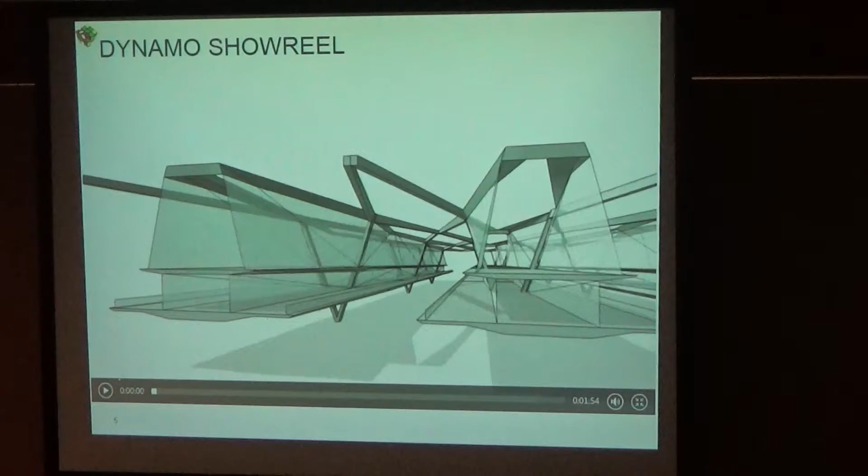But according to the company website, this is the definition of Dynamo. It extends building information modeling with the data and logic environment of a graphical algorithm editor. Yes, it's a programming interface. It is similar to macros, but you don't have to have any programming experience to use this. It's basically pretty pictures with functions attached to them that get placed in a workflow or a specific sequence that can perform functions. Right. I want to show you a quick show reel from the Dynamo website, and the idea is just to give you an idea of what Dynamo's capabilities could be.

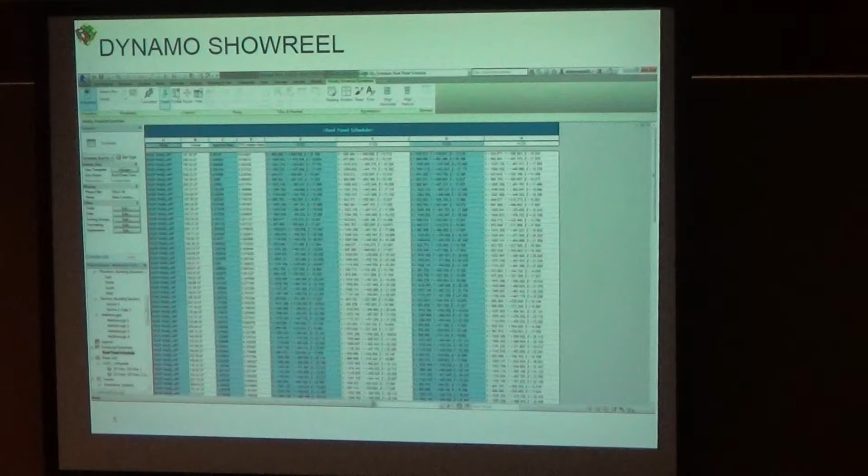Okay, so the purpose of that video is just to show you some of the bragging rights that Dynamo has accumulated since its inception. It's quite a powerful concept and a powerful tool that can actually produce quite a lot, but let me add to this that it is buggy. Currently the latest version is 0.8.2, so the 0 should indicate to you lots of problems.

Not that I'm saying it's not worth it. It's definitely worth it. I'm just saying it is what it is. Say again? You're not saying it's not worth it. You are saying it's what it is. It's worth it. It costs money and it's got bugs. Yeah. But again, there's nothing else that can do the same job, so you're pretty much stuck with it.

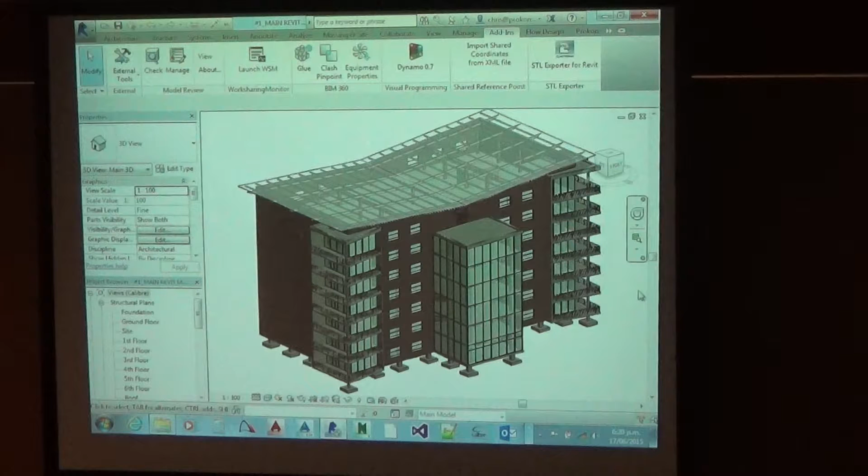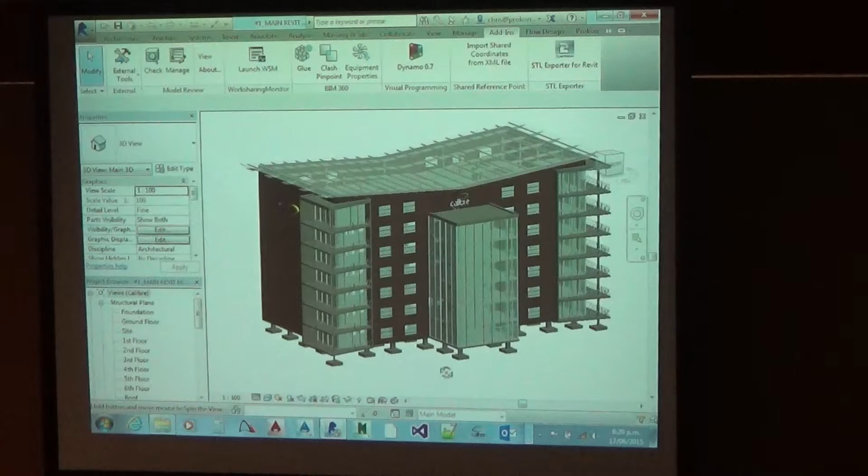All right, so let's jump into it. Now, again, there are many demos available online. I'll give you the link to the Dynamo site where you can get lots of tutorials, videos, samples with scripts on how to follow them. What I want to do tonight is slightly different, and this might apply to all disciplines. I've got a basic Revit model with some structural and architectural components. What I'm going to attempt to do is to extract all the columns from this model for this example, and then add a mark to them.

So basically I'm running the positioning macro from the extensions, but I'm going to use Dynamo to do this, and I want to build some intelligence into this. So instead of just marking all of them with some sequential numbering, I want to be able to coordinate that according to their position and level within the model. So we'll start off simple, create a basic extraction and a basic placing the data back into the model, and then after that we'll run a bit more complex geometry based sequence.

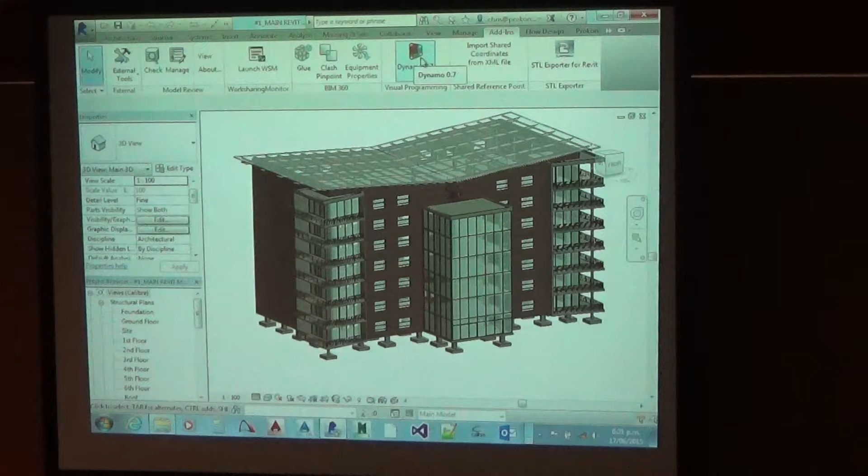Alright, so as I mentioned before, there's a newer version of Dynamo available, 0.8.2. I've tried it and I find it to be more buggy than the previous versions. The most stable one that I've come across so far, it might change week to week, but currently 0.7.5 is the best one. So that's the one that I'm going to use. You can have multiple versions installed. It will just list them on the drop-down. But as soon as you've run one in an instance of Revit, then for the rest of that application lifetime, until you close it, you can only use that one version. So if you want to use another one, you close it down, open it up again, then launch the other one.

So, all right, this is the Dynamo interface. So I'm going to start with a new project. We'll build this one from scratch. I'm going to click on new.

Now just to explain the interface, you'll see there's new, custom node, and open. Custom nodes are sequences that you can create for yourself, which I'll get to in a second—basically a combination of a couple of built-in tasks that you combine into one sequence. All right, so that would be a custom node.

Now, if I start a new project and we look at nodes, that would be the items listed here on the left-hand side on this panel. So what I would like to do is first extract all the column elements from the model, put that into an Excel spreadsheet, do some functions in Excel, and then bring that information back into the Revit model.

All right, so first I'm going to start with extracting the geometry. I'm going to tell it to access a Revit component—it's going to be a selection component. And how do I know this? I don't. I Google a lot, and you really have to just fiddle around and sort of trial and error until you get the best solution.

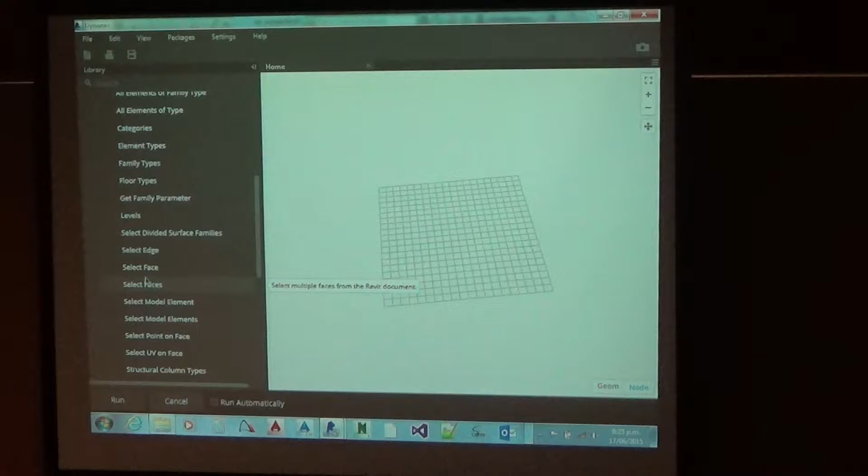This one is my solution. Yours might differ from mine, so it all depends on what you want to achieve and how you go about that. But I would like to query categories. So I've placed a new node now into my workspace, and from this I can indicate the category—in this case it's going to be structural columns. So from the list I can select structural columns. It won't list all the available categories in the Revit model, it will list all the available categories in Revit.

Okay, so it's quite a lot of them. Alright, so now that I've indicated that I want to extract, or I want to work with a selection called categories, I have to tell it that I want all elements of that category. So notice how each node has got an output and it might have an input.

In the case of categories, the input is manual. In case of output—oops, did I break it again? Let me just quickly tell it again: I want structural columns. So once I've selected that, I need to take that output and plug it into the input of all elements of that category. So this is basically a node, or a feature, that performs a list of tasks.

Now those ones can be a combination of a couple of other nodes, or it could be a Python script. So you can actually do some proper programming within Dynamo if you really wanted to. Anyway, so now we've said we want all of those elements.

Now what I would like to extract from this is first of all the name of the column, and then the ID of the column. That's quite important. So to do that I'm going to search for that node. It's going to be under Revit—it'll be an element node. Under the element category I'm going to query the element name.

Right, so I click on it and I place it. Now, I've obviously done this before. If you are not sure where to find the nodes, it's actually much easier typing it in. So if I want the element ID, I could just type element.id, and notice that it will filter out the elements in the list, and I can just click on it and place that in the model where I want to create it.

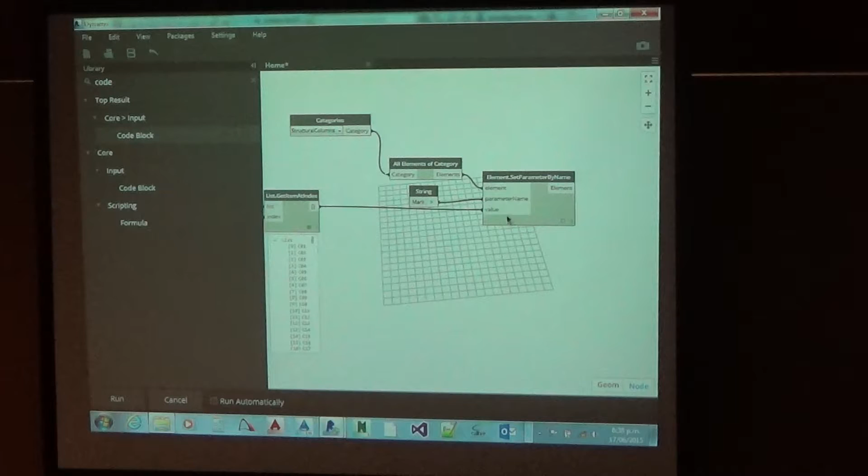Okay, so now we pretty much have what we need, I think. So let's see what happens. I'm going to run this, and if I don't get any errors or crashes, then it's worked.

It's worked. Okay, so let's go back into Revit. Now let's have a look at what happened.

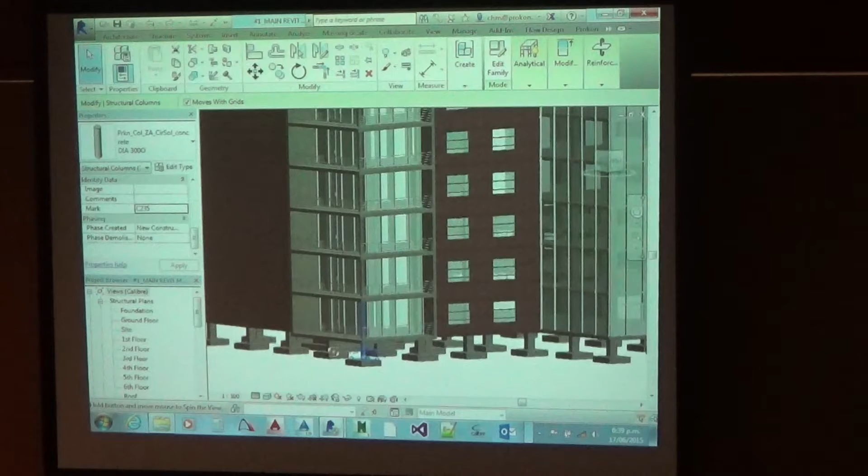So if I select the first column here at the base, C235. So something has happened. This one, C33, C32, C31. You can see it's pretty much not very well numbered. They're pretty much in the order that I placed the columns when I generated the model, except it's reversed. So the last item would be numbered first and then all the way back to the beginning, which could mean anything.

So it's already a good start, but now I would like to actually coordinate this a bit better and organize this. Now I took exactly the same input. I'm just going to open up the output files to show you what it looks like, and I'll make that available somehow so you can download it as an example.

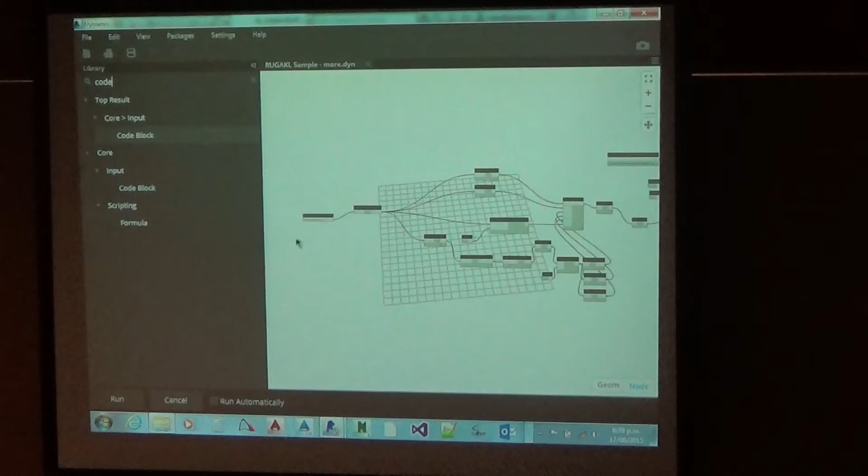But let's look at what is required to get more out of this. So the first thing I did is I used that exact same method. So there's my input category, structural columns, all elements of that. I wanted the name and the ID, and then I just said I wanted to query the mark because I've already assigned a mark here, remember, but I don't have to because I'm going to change it. And then I said I also want to query element geometry, specifically the bounding box.

From the bounding box I could get the minimum point. Well, min and max as that thing says, but I wanted the min. So I wanted the minimum point, x, y, and z. Once I've got the minimum point, I put it into a list, and I got the items at the indexes that I require them for x, y, and z. How did I know which index I have to work from? I didn't. I placed a check there, I ran through it as I built it, looked at the output, and then saw, okay, 0, 1, 2, 3, that's the one I want.

And then from that, I created point x, point y, point z. These nodes, I did not create them, I just took them from geometry, point, and you'll see that they are create, query, etc. x, y, z. So I queried the x, y, z positions of the bounding boxes of each column.

And that should at least give me some sort of a uniformity if I modeled correctly. If I use one column from the base all the way to the roof, then this doesn't work and you probably shouldn't use Revit. But so it all depends on the way you've modeled.

Now once I've done this, I created a new list. Instead of just using the name and the ID, this time I've got name, ID, what's the third one here? I've got X, Y, Z, and then finally I've got the element parameter written into that. Transpose the list, put that all back into an Excel spreadsheet.

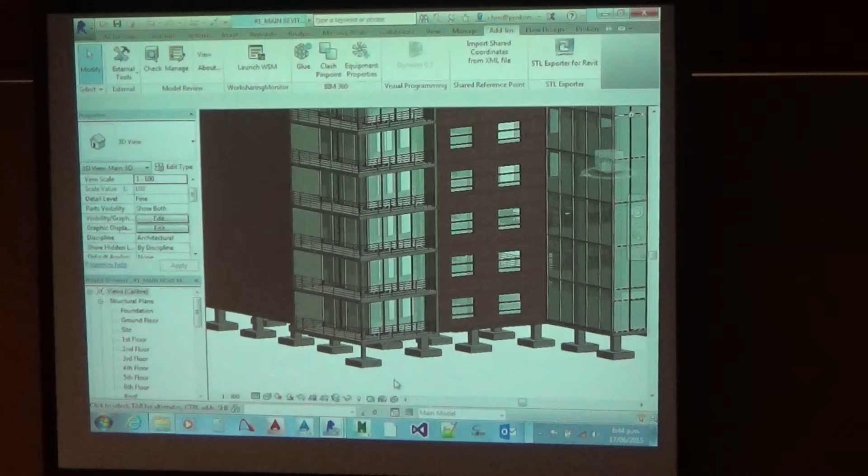When it opens up Excel, that's pretty much an indication we got to that step already, which is good. I'm going to minimize that, minimize this, look at my Revit model, look at the numbers, and notice this one is CO1, CO2, CO3, CO4, but let's go a bit further.

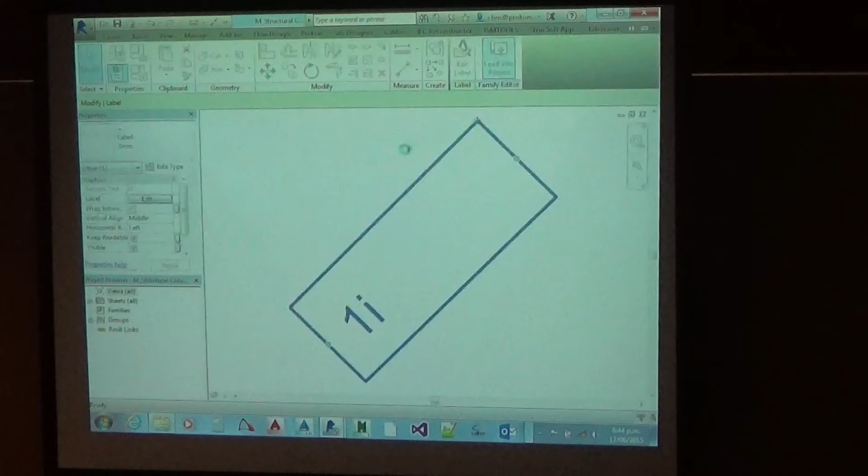I'm going to go to my ground floor level and quickly annotate all the columns, then cheat and change this family so it shows me the mark numbers. Let's show the marks of all of them. Load it back into the project. There we go - starting from the bottom left, CO1, CO2, CO3, CO4, CO5, CO6, CO7, CO8.

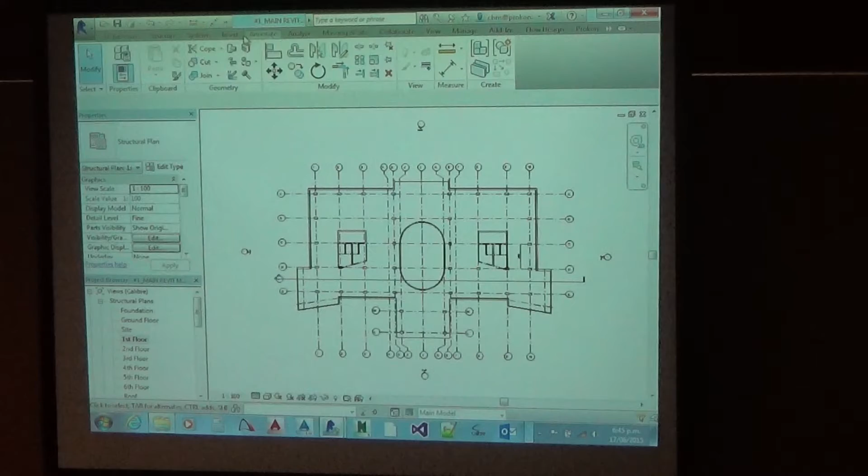Pretty neat. If we go all the way to the top here, C40, but in the X direction I've got one more on this side, so C41. Let's go to the next level, first floor, do the same thing and annotate that. There we go - starting 42, 43, 44, 45, 46, etc.

That's a very basic principle on how to achieve this. It took me quite a bit of time to develop this Dynamo thing to work properly, and it wasn't my initial idea - I felt a bit dumb not getting the element IDs to match up. But that goes to show there are different ways that might even be quicker of achieving the same goal. Once I've got this running, this routine can be used again and again to save me time in the future. Hopefully that helps a little, and hopefully you can see some use for this. You can do window and door scheduling with this, or label truss elements or whatever you've got in the model.

So that is the link, dynamobim.com - no www in front. From that page you'll be able to download Dynamo and install it. There are lots of tutorial videos available from that website as well, with some sample files - it's pretty neat. Once you install Dynamo, there will be some sample files within the package as well, which is quite clear. There's a write to Excel sample, and an import one from Excel too, so you can start working with that if you want.

And that's it. Any questions? Are you using it - like how are you actually making the little nodes and stuff? How do you know the right one to choose?

You don't - you test them out. It's got a watch. Maybe I should have mentioned this: I use that checkbox to sort of debug and see what is happening in the background. But what you could also do, notice I've added something here called a watch - it's the same as checking this box basically, but this watch shows me the output.

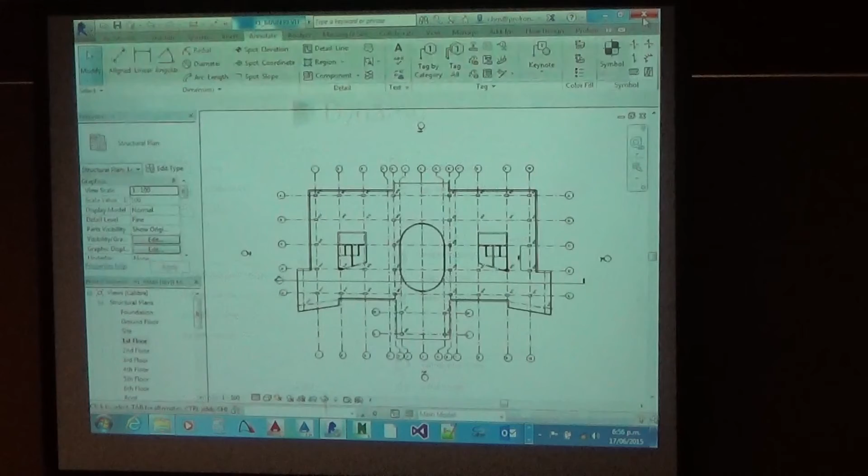All right. Thanks. Well, thank you. I'll see how I can make these data sets available for download. That would be great.

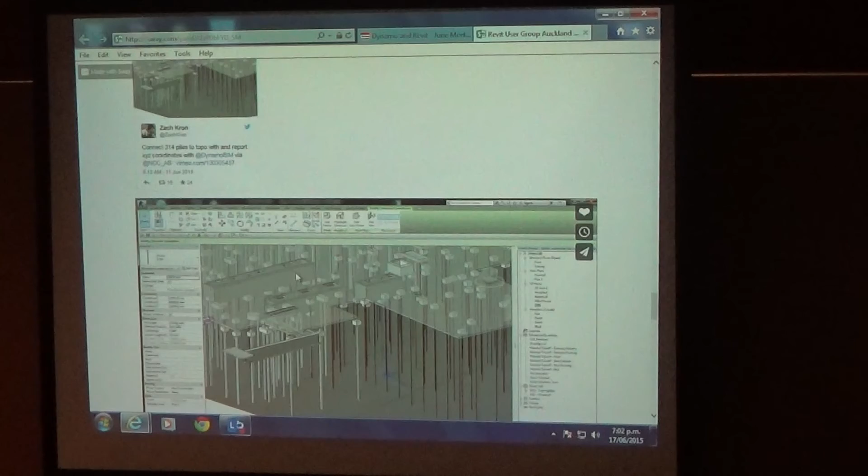And another Dynamo one was found through Twitter. So that's the actual tweet embedded in Sway. And it was just showing how they've used Dynamo to connect piles to a topo surface, so they could actually report the depth of drilling and that sort of thing. And it's a video that's on Vimeo, nice high-res video, so you can actually follow it through and sort of see step by step how they've done that. So that's just a few sort of things.

And the last one that came through, which probably everyone got in their inbox, but thought worth mentioning, they've released the early bird pricing for Autodesk Australia University, but it only lasts till June the 19th, so you kind of have to make your mind up fast. It seems a bit dark. And the actual event is in August, so 20th and 21st of August. So it's all a bit sort of short notice, I kind of think, but it's out there now.